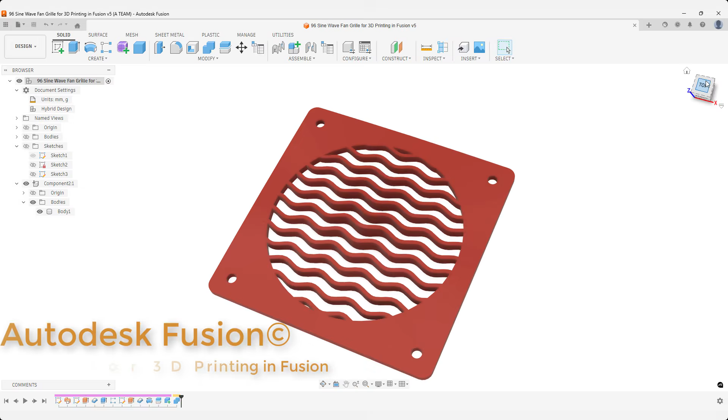You'll learn a reusable workflow that combines solid and surface modeling while creating this fan grille for 3D printing.

Press S to open design shortcuts. Create a center rectangle and dimension it to 120 by 120 millimeters. This center rectangle defines the frame. Most of the sketch geometry will be built inside it.

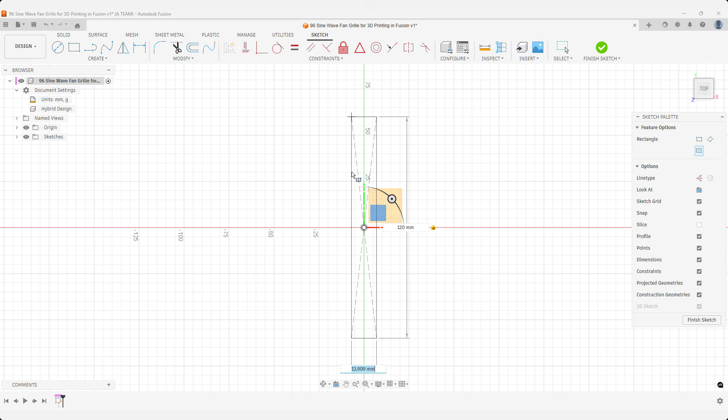Press C and create a center diameter circle at the origin. Set the diameter to 100 millimeters. Move to one corner, press C again to create a mounting hole, and set the diameter to 5 millimeters.

Press D and dimension the hole 10 millimeters from the outer frame. Do not worry about exact placement, the dimension controls it.

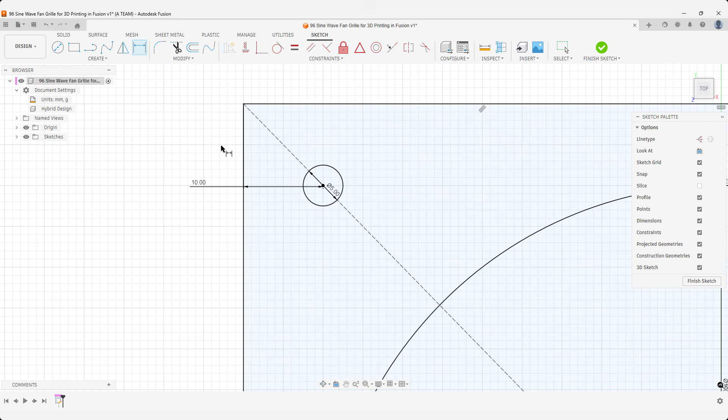You could argue that this pattern is better created in the solid modeling environment. It keeps sketches simpler, which is generally good practice. For demonstration purposes, we will use a rectangular pattern in the sketch environment.

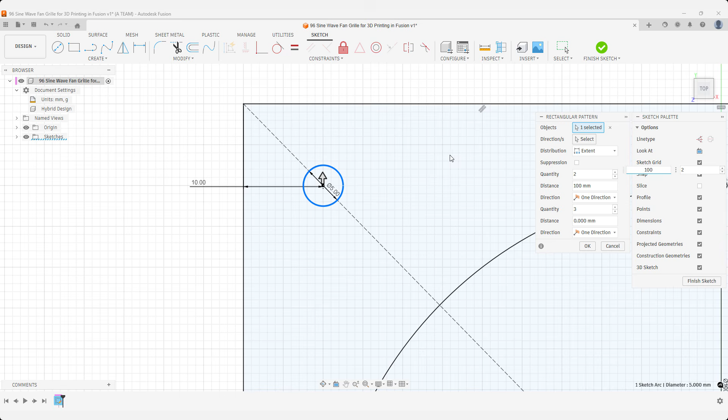The frame is 120 millimeters wide. The hole center is dimensioned 10 millimeters from each edge. That means the pattern extent is 120 minus 10 minus 10 equals 100 millimeters. Set the extent to 100 millimeters in both directions, and set the quantity to 2 in each direction. You now have 4 mounting holes.

It is fast to set up this way, but it is slower to edit compared to a model built with linked user parameters. Open Design Shortcuts and choose Sketch Fillet.

Remember, F is for Solid Fillet, not Sketch Fillet. Set the radius to 5 millimeters. Apply the fillet to all 4 corners before confirming the command.

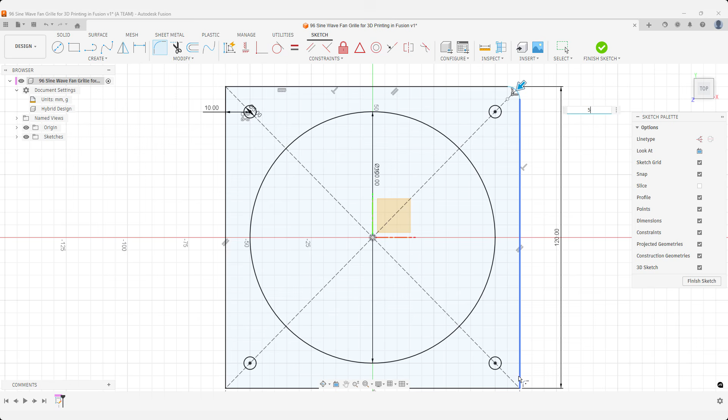Again, this is fast to set up. But edits are slower compared to using user parameters or linked fillet features.

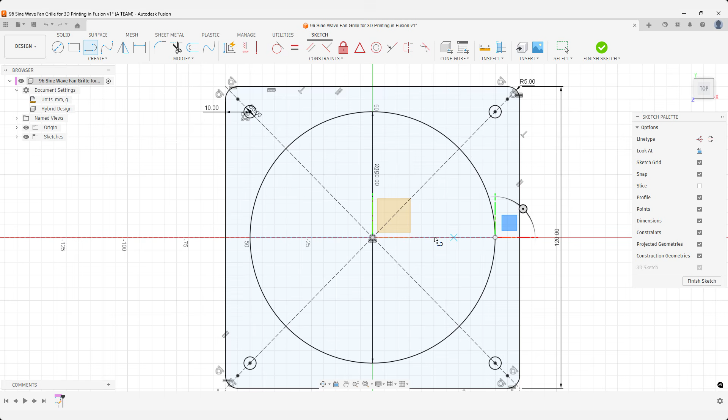Create a sketch line through the center of the circle. This line, together with the 3 mm line added at the endpoint, defines the structure of the sine wave. Use the same dimensions shown here or experiment with your own values.

When the lines are in place, switch to Surface and use Sweep. The Surface Sweep command allows you to work with open sketch profiles along a defined path.

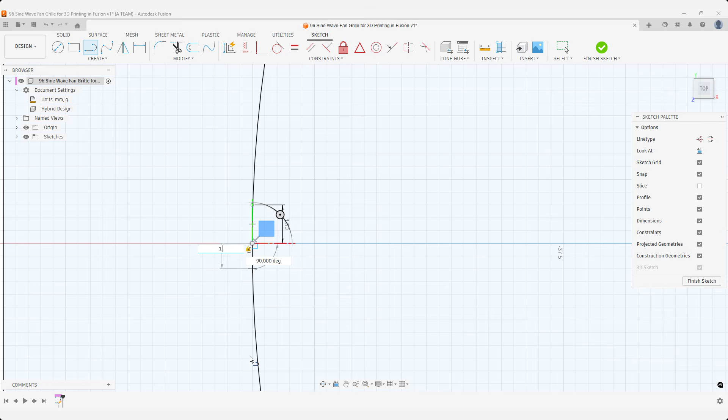Press S to open Design Shortcuts again. You can distinguish between solid and surface tools by their color. Blue icons are solid modeling tools. Orange icons are surface modeling tools.

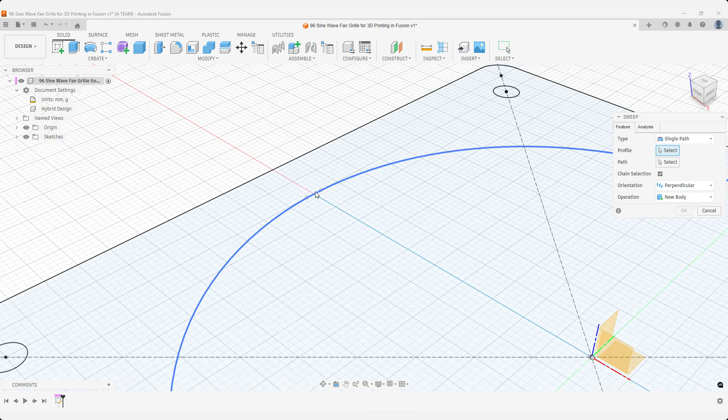There is a lot of geometry in the same area here. If selection becomes difficult, press and hold the left mouse button, then choose the correct profile from the pop-up selection list. The straight line through the circle is the path.

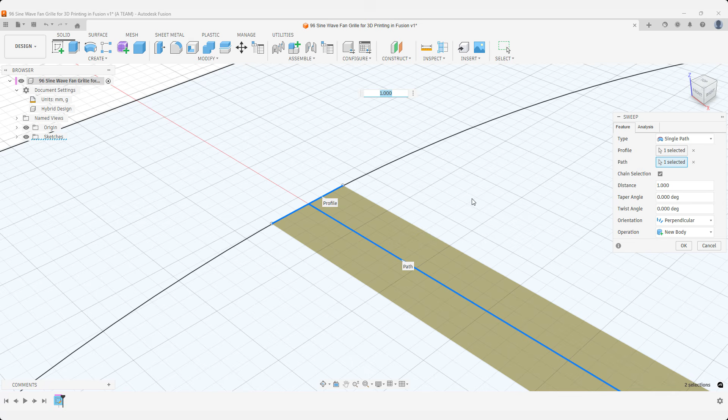Set the twist angle to rotate 360 degrees times 5. After entering 360, the twist input may deselect automatically. Click inside the box again and multiply it by 5.

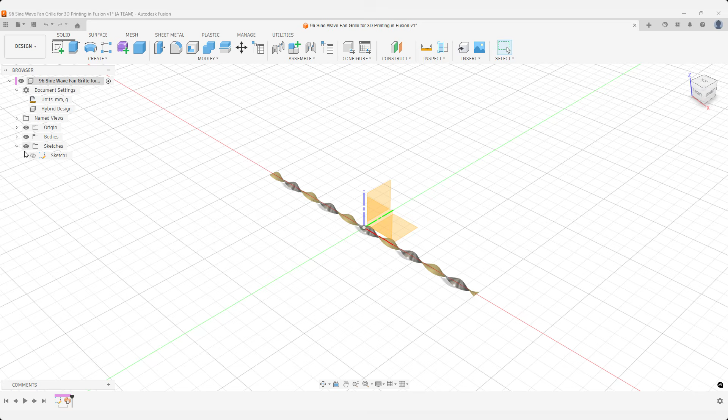Fusion may automatically hide sketches after completing a command. If that is not helpful in this case, simply turn visibility back on. It is a useful feature, but not in every situation.

Create a new sketch on the flat construction plane. Press S and use Project from Design Shortcuts. Project the relevant edges from the Sine wave surface geometry into your new sketch.

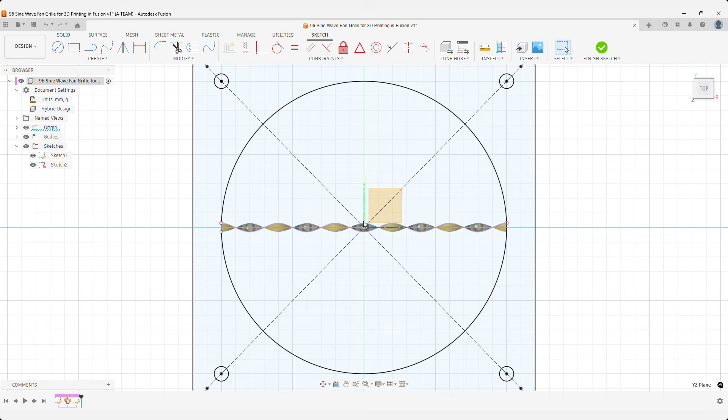Use Surface Extrude, recognized by the orange icon. Extrude the sine wave 10 millimeters. This height is a good candidate for a user parameter if you structure the model properly.

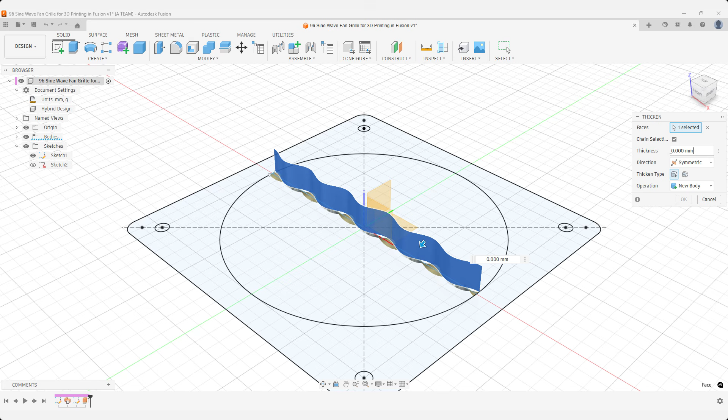With the surface created, apply thicken and set it to symmetric. I'll use 1 mm for this digital prototype, which is thin. If you plan to 3D print this, consider a thicker value depending on use case, material, and print settings.

Press E for extrude and extrude the remaining profile as a new body. Since we created the holes and the fillets directly in the sketch, this final extrusion is simple. Most of the decisions were already made earlier in the process.

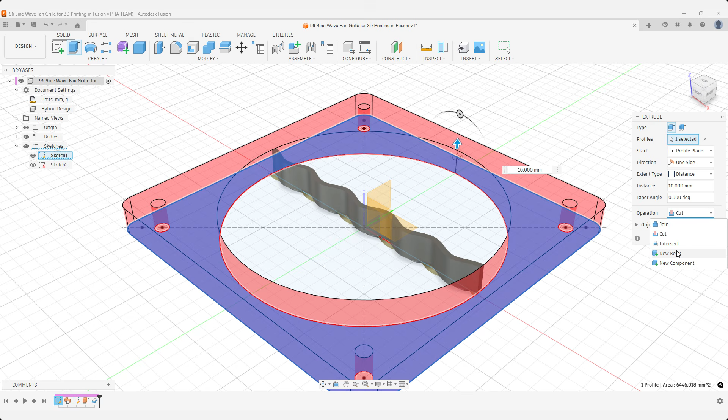There are always different ways to build the same model in Fusion. Some approaches are easier to edit later, others are quicker to set up. How would you approach this design? Let me know in the comments and explain why.

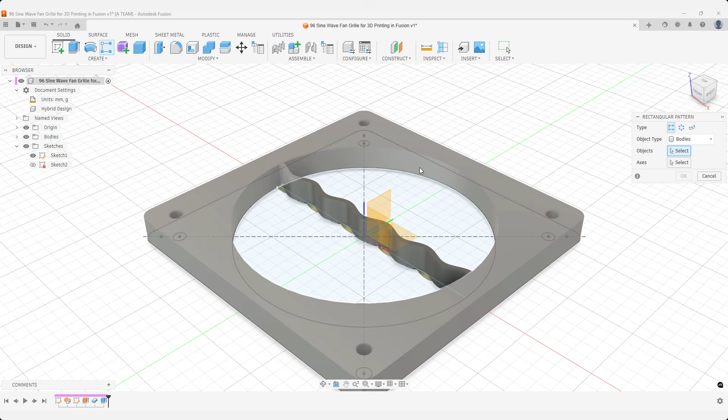We're using a solid modeling rectangular pattern instead of patterning the sketch. One benefit is that the pattern appears as a single feature in the timeline, which makes it easier to manage later. Set the direction to symmetric. Change the distribution to spacing and enter an interval that fits your design.

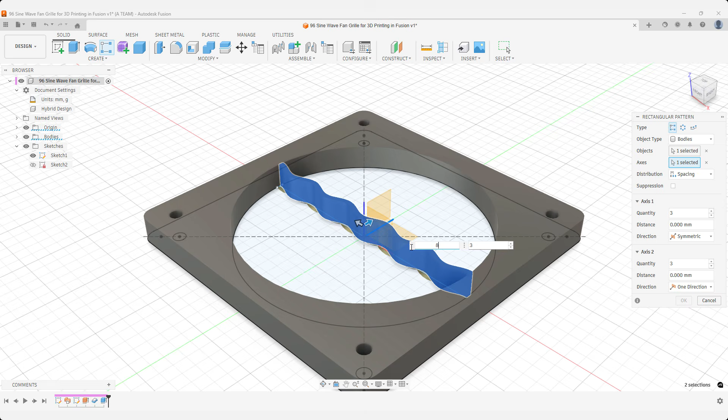You'll see several waves intersecting the main body. That's fine, we'll fix that later.

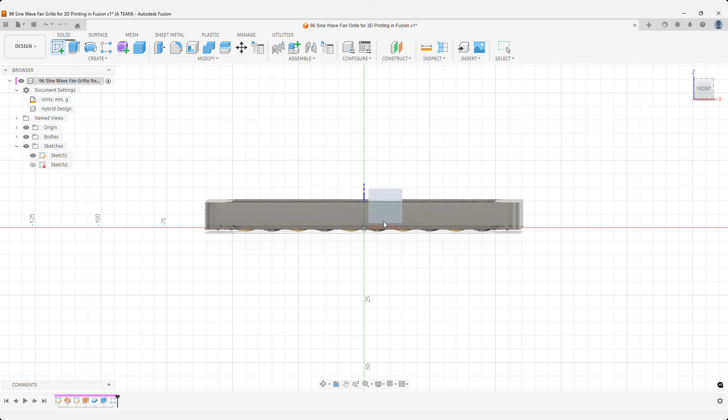With the waves in place, let's shape the curvature that gives the top its rounded form. We'll use a fit point spline for this. It's quick to set up, easy to adjust, and gives you a lot of flexibility.

I'm keeping it simple in this video, but this is a step where you should slow down and iterate a few times. Small adjustments can make a big difference in how smooth the final shape feels.

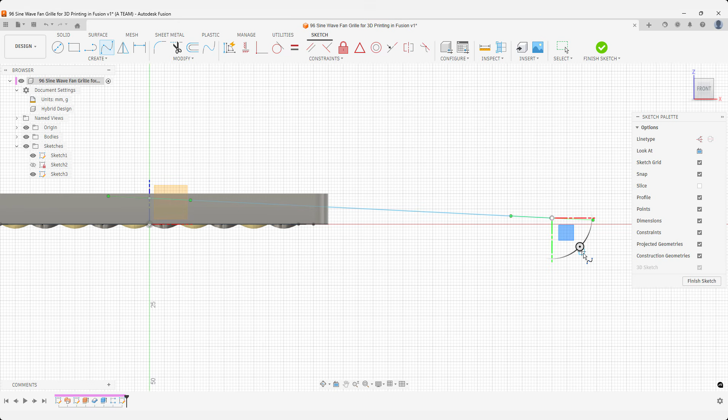Make sure you oversketch the spline. It should extend well beyond the base body. If it's too narrow, you won't reach the corners in the later steps when we start cutting away material.

I really enjoy working with these green handles. It's easy to stay here and keep refining the curve. But if I do that for too long, people will start dropping off the video. So let's move on.

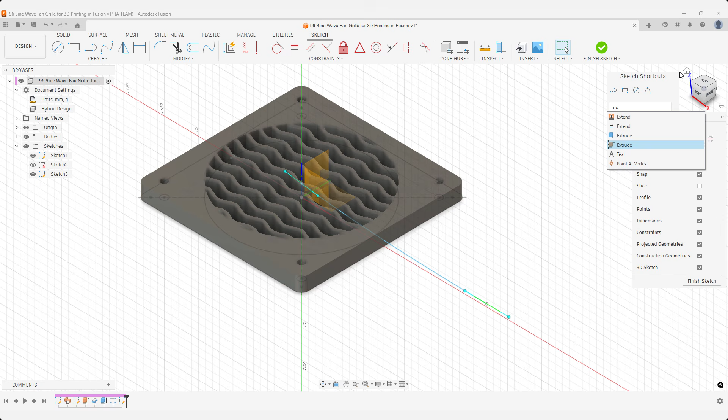You can always come back later and fine-tune the curvature once the overall shape is in place. The purpose of this thin symmetric extrusion is simply to create a surface that is wide enough to thicken later.

You can even over-dimension the thicken value to speed things up. Just make sure to switch away from the symmetric setting if that is pre-selected. You only want solid geometry above the fit point spline.

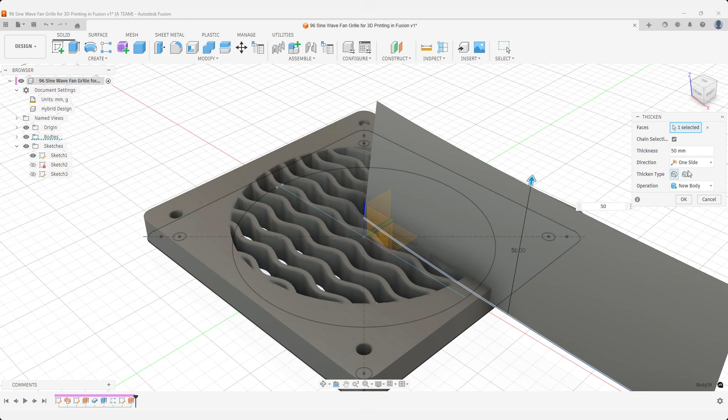This solid will act as the Revolve cut tool. Before we continue, this is a good moment to save your project and add a short description.

With the project saved, activate the solid Revolve tool. Set the operation to cut and revolve the body 360 degrees around the axis in the center of the canvas.

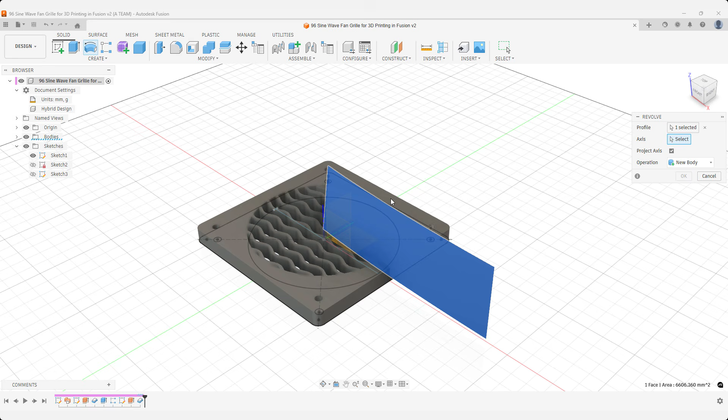The model looks great, but if I plan to 3D print it, I would revisit the fit point spline in the timeline and adjust the green handles to create a smoother top surface.

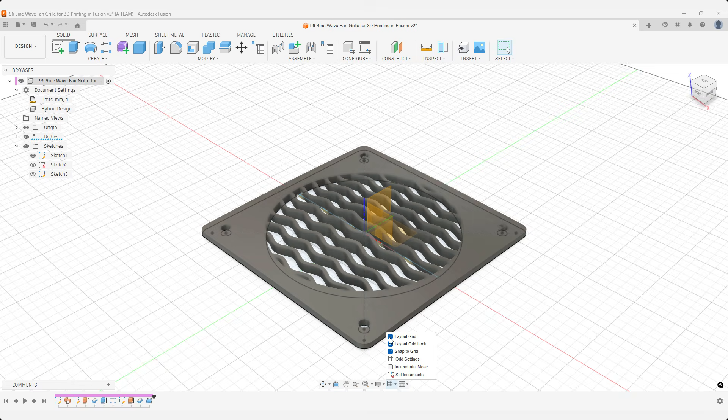Turn off layout grids and sketch visibility, then save your project before continuing.

Next, combine the bodies and do a quick quality check. There is also a small error we need to fix, something that was easy to miss earlier because we moved through the steps quickly.

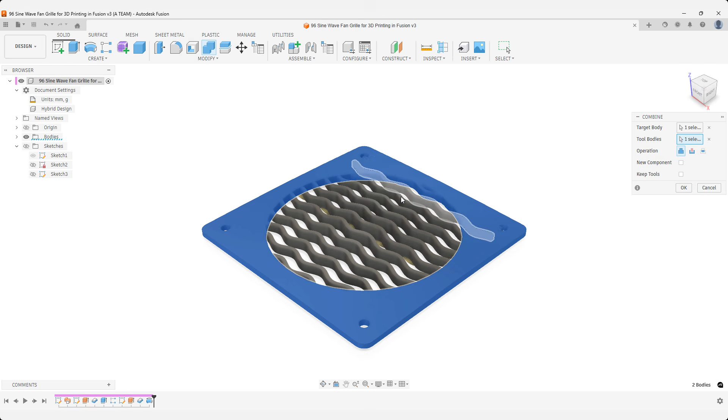For the tool body selection, make sure all bodies are highlighted in blue. You can also follow the body count in the pop-up window on the right.

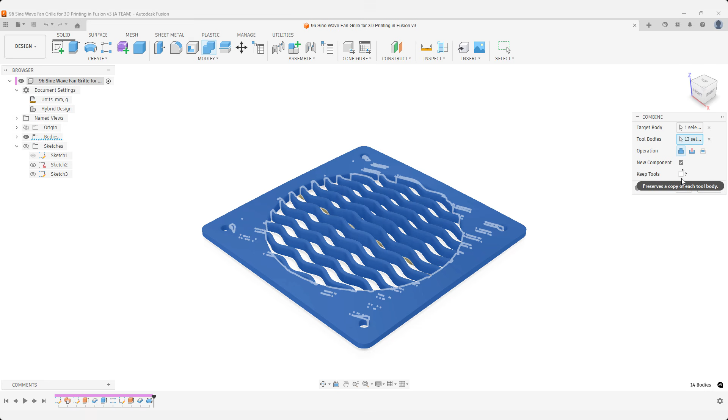Finish the operation as a new component and switch to a top view. This is where the error becomes visible, and the lesson here is to do this kind of visual check earlier in the process. One of the sine waves runs into a mounting hole.

It's not a big problem and it's easy to fix. But ideally, this should have been caught proactively rather than reactively. That said, there's nothing unusual about iterating a design as you go.

My strategy for fixing this, and feel free to share your workflow in the comments, is to go back in the timeline and add a split operation.

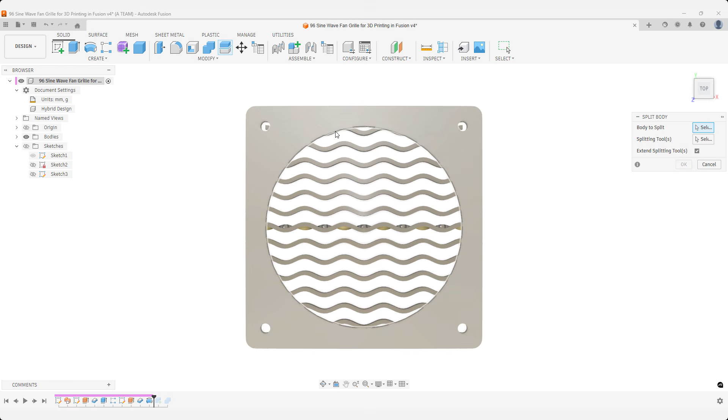After completing the split, instead of updating the existing combine operation, I simply delete it and create a new one. When setting up the new combine, I just leave out the part of the sine wave that was split.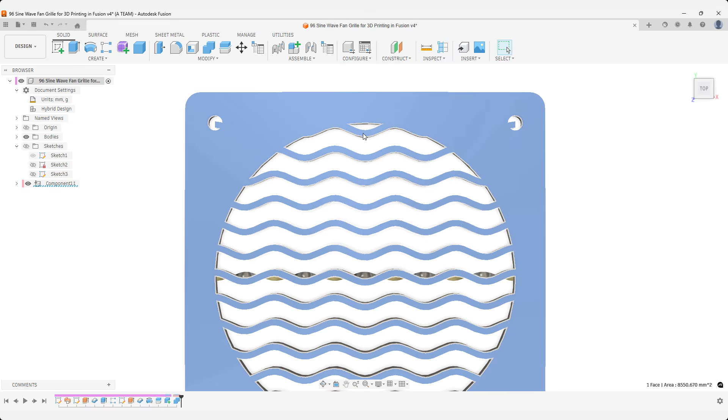Remember to also delete the component that came out of the previous combine operation. We'll simply create a new one when we run the combine again.

For some reason, the bodies didn't all turn blue when I selected the sine waves, but the count in the pop-up window confirmed that they were selected.

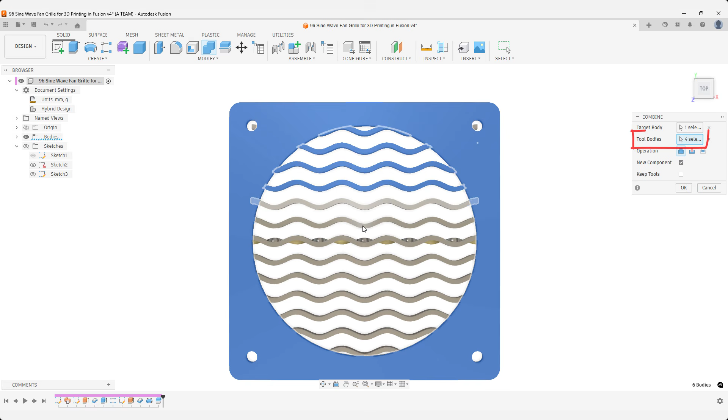With the new component in place, we can hide the bodies that aren't part of the component, and the design is finished.